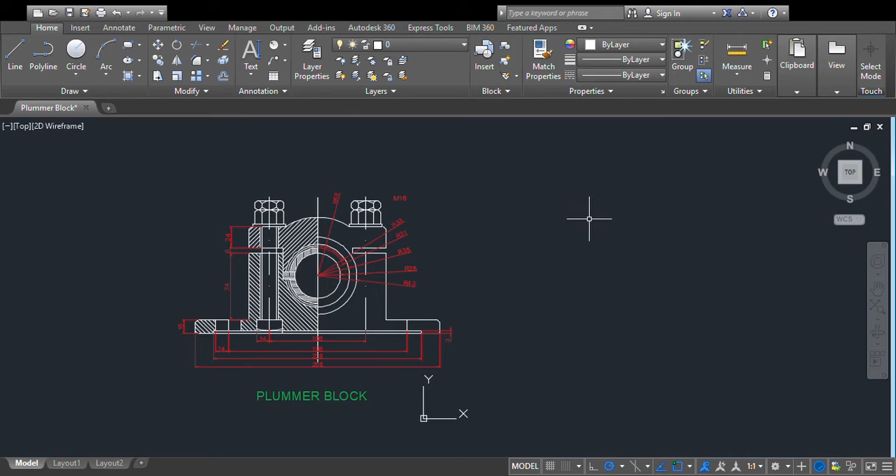First we will draw the circle of radius 25 mm. Then draw another circle of radius 35 mm. Then one more semicircle of radius 43 mm.

We have two more circles here, of radius 31 mm and 33 mm. So you got all these five circles.

Now this outermost circle is semicircle only, and the two inner circles are also semicircle. So we'll draw lines like this so that we can trim the unwanted portions.

Now select this circle, it should be half. Select this line to trim, and you don't need this portion you're trimming. Then for the second, these two circles, you don't need this much portion, so you are trimming unwanted portions of that circle.

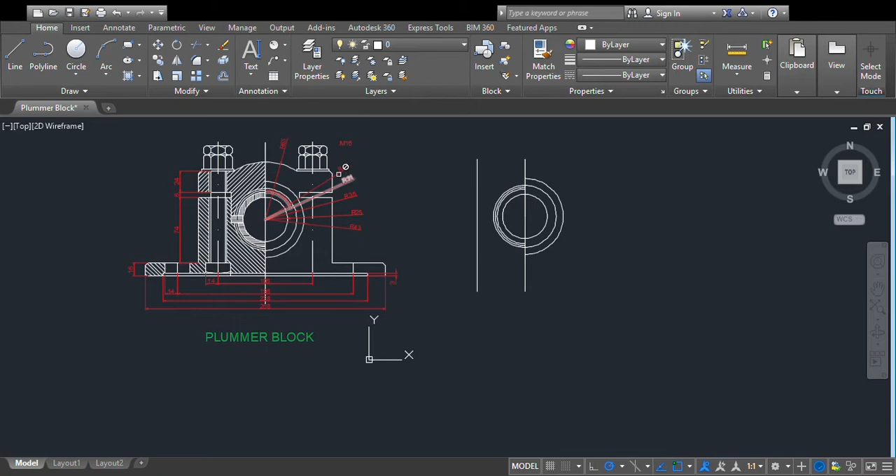Then on this side, this is an M16 bolt, which means 8 mm on either side you have to offset. So offset this one through 8 mm, on this side and this side.

Now you have to find the distance of this center from the base here. That linear distance from this center to here is given as 74 mm.

So through this center point we will draw a line like this, and then we will offset that. Now we will offset this line through 74 mm.

Now you got that point. From there this is 3 mm, so you have to offset this one through 3 mm, this line offsetting to 3 mm this side and this side. Now you got those two lines and this point also.

Now this is 14 mm away from the center point, so you have to offset this line through 7 mm on either side. Sorry, that is actually 14 mm, so this line you have to offset through 14 mm, this side and this side also 14 mm.

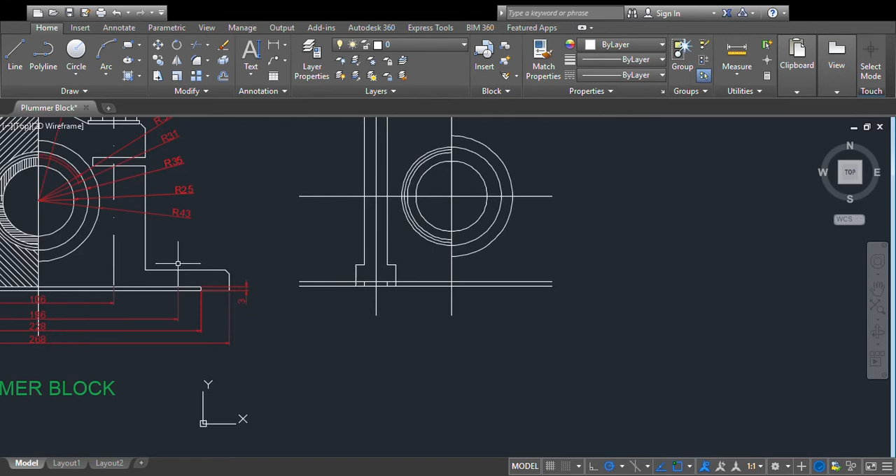Now this line you have to offset through say 2 mm on either side, to show the threads here. You have thread here, so to show that thread you have to offset this line through 1 mm or 2 mm on either side.

Before that we will measure the dimension, from here to here, that is 2 mm.

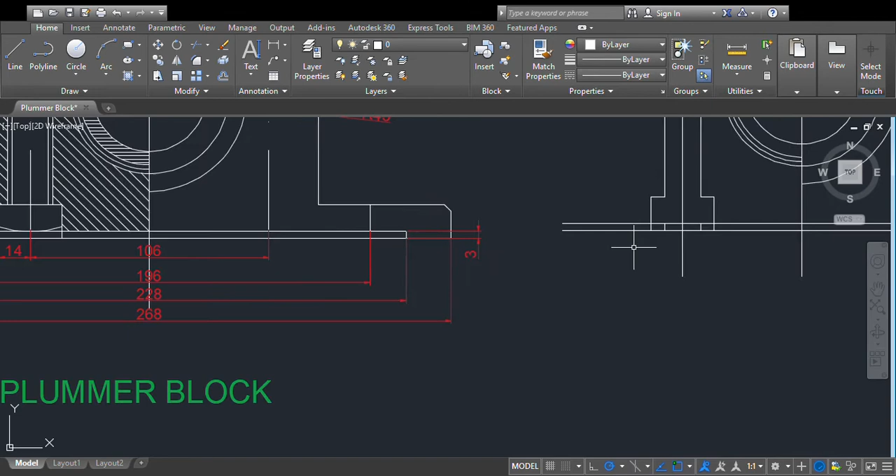So you have to offset that line, this line through 2 mm. Offset through 2 mm on either side, this line to this side and this line to this side. So you got that thread also.

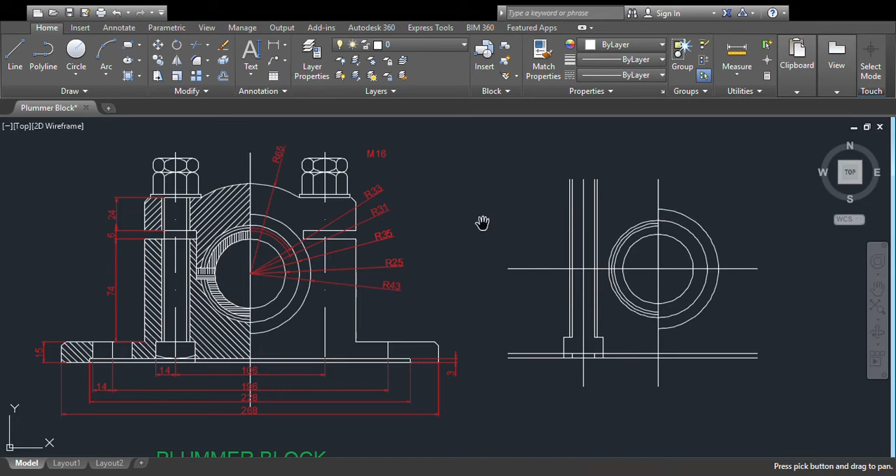Now you have a curve here, you have a curve here, you can see, you have a curve here like this. So to draw that curve, what we'll do is first we will erase this unwanted line.

Then we will offset this line through say 2 mm, this line like this. Then we will draw a curve, arc 3 point, from this point through to this point and up to that point. So you got that curve also.

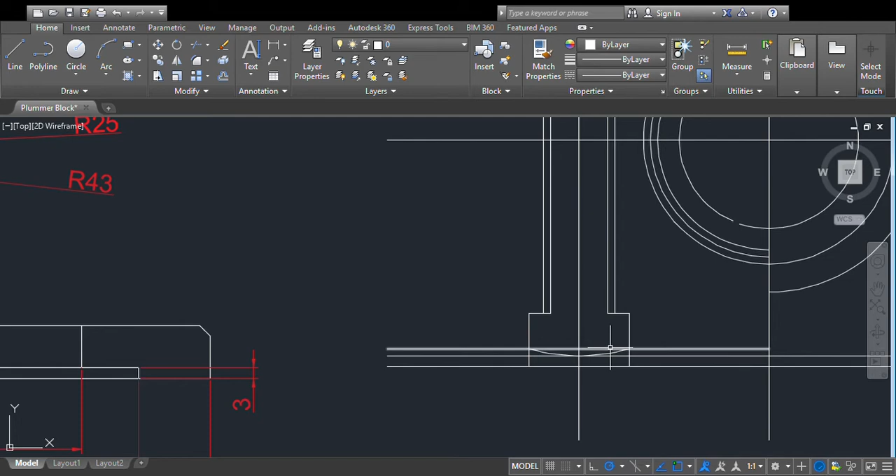Now this line is unwanted, so you will erase that, delete that. You got that curve also.

Now we have to find this distance. This is 15 mm away. So this line you have to offset by 15 mm. This line you are offsetting through 15 mm here. So you got that line.

Then you have this, this is 106, and here you have 196 as the distance from here. So 196, that means half of that is 98. So this line you have to offset through 98.

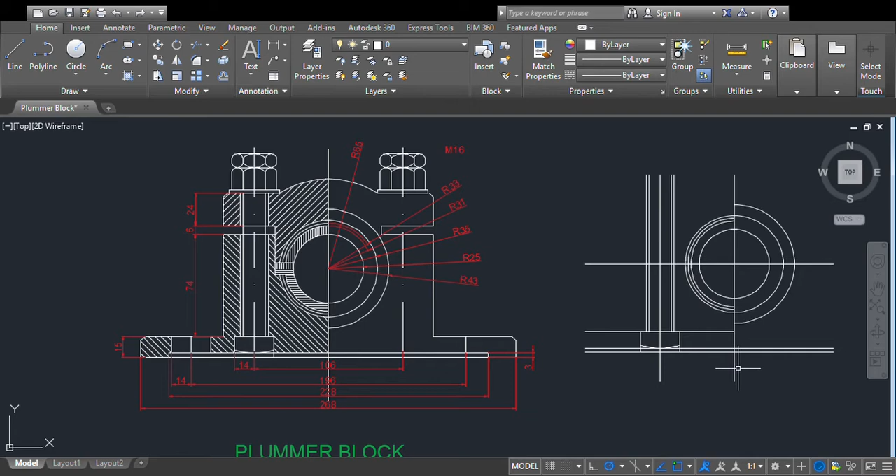First we will just move this object a little bit towards the right. Not that much, slightly only, because we need this diagram nearby, then only you can complete the diagram.

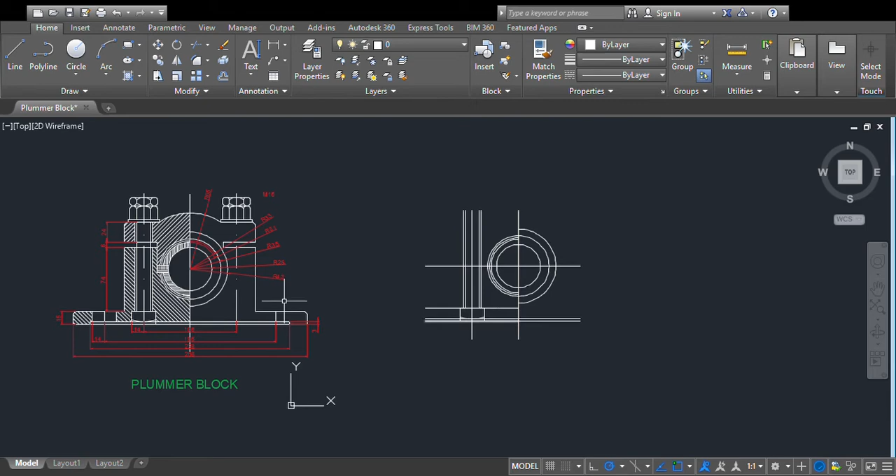So this is 196 mm from this center point to this center point. You have a hole to fix that object, this Plummer block, to the ground or something like that.

So you have a hole here, two holes. That is 196 mm, that means 98 mm, you have to offset this line, half of that. Offset through 98 this line to this side. Then you got that line.

Then you have this line you got, and this is 14 mm. Again you offset that through 14 mm on either side, this line to this side and this line to this side.

Okay, then you have this, this is 268 mm, the outermost diameter, so outermost distance. So this line again you are going to offset through 134 mm, this line you are offsetting through 134 mm like this. You got that line.

Now we'll extend this to meet there, extend this up to this line. This line you are extending to there. Then you got that point.

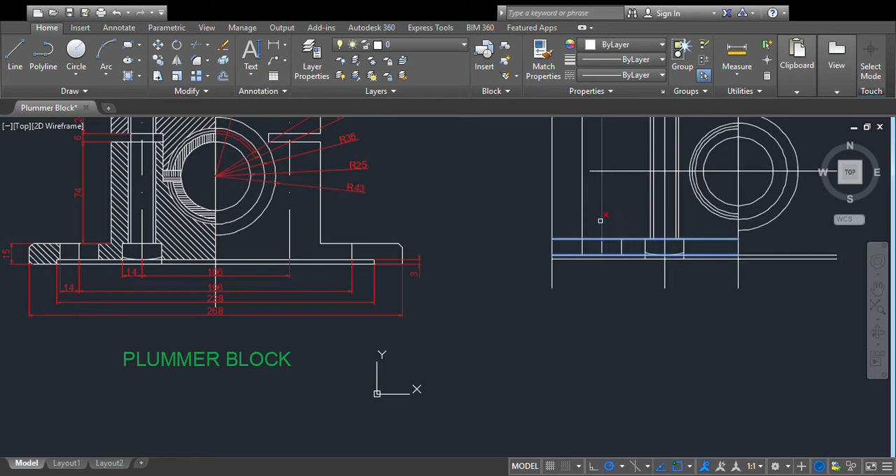Now you can erase unwanted portions. Trim this line and this line, this line and this line, you are selecting and then trimming all these unwanted portions. So you got that portion also.

Enter. Now next you have to draw this bolt. To draw that bolt, first you have to draw this line.

That distance from here is 74 mm. So offset through 74 mm, this line like this you are offsetting. You got that line, and again you have to offset that through 6 mm and 24 mm.

Again offset through 6 mm, this line through 6 mm and 24 mm, like this you can offset. So you got this line also.

Now there's a bolt there. To draw that bolt, just offset that line through 2 mm, offset through 2 mm, this line like this.

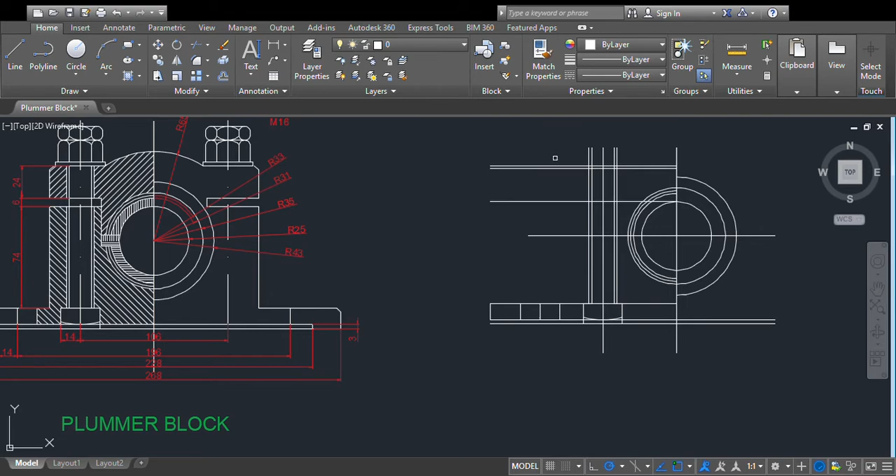Here you have a square, this is a hexagonal bolt, this is 16 mm. So again offset through 16 mm, this line through 16 mm, you got that point. Now just draw a hexagonal bolt here.

You have to trim this portion first. Trim this portion. You don't need this portion, so that is okay.

Now this is 8 mm on either side. This line you have to again offset through 8 mm, this line to this side and this line to this side. Now we'll just offset this line through 2 mm, this line like this. So you got some points here.

Now again you have to offset this line to 4 mm, offset through 4 mm, this line like this. You got the center point.

Now extend that to meet there. Extend this to here, this line you are extending, you'll get that point. Now you draw a curve through all those 3 points, like this: 1, 2 and 3.

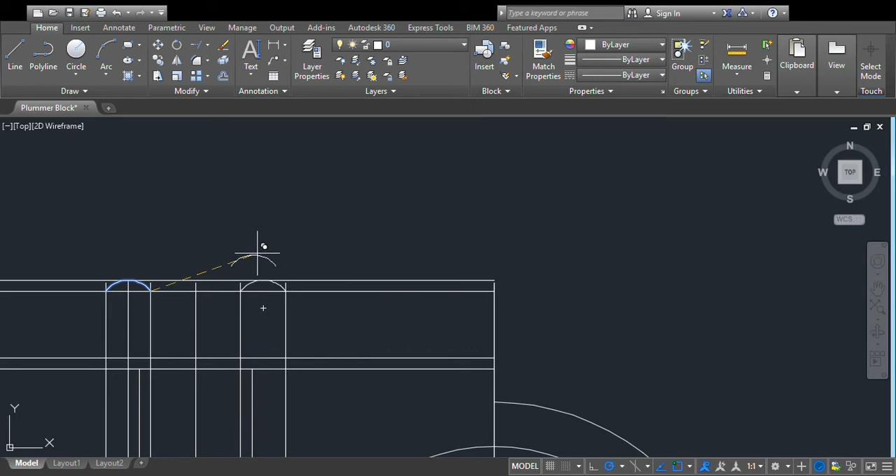Now just copy that curve, and move it like this. Then you have to draw one more curve here. So for that you have to extend that line to meet there. Extend this line to here, so you got that point also. Now another curve, arc like this, 1st point, second point and third point. Now you got that one.

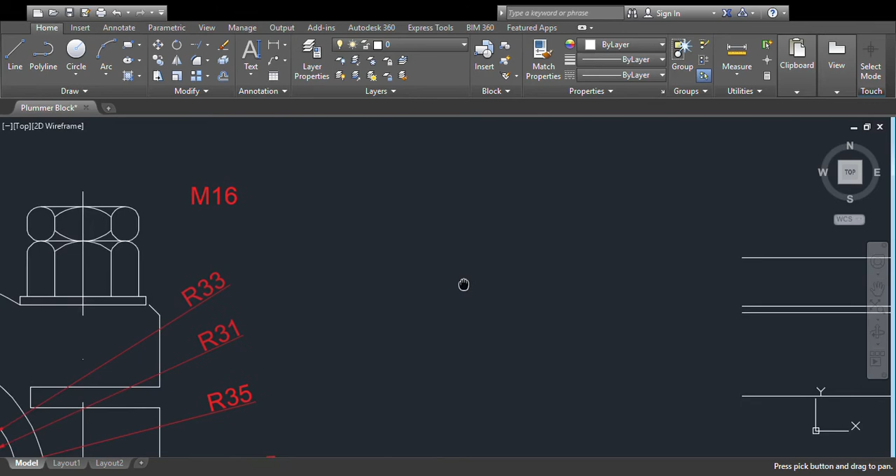Now we'll just erase this line, delete this line. Then unwanted portions you can simply erase. Now here you have, if you see this one, there is a bolt, supporting bolt, locking bolt, locking nut there. So to draw that locking nut, this line you have to offset through 8mm or 10mm, offset through 10mm, this line. Okay, so you got that line.

Then again you will offset that through 5mm, offset through 5mm, this line inwards like this, 5mm.

Now we'll take the mirror image of this one. Mirror, this 1, 2, 3 objects, and first point is this one, and second point is here, and mirror image. Mirror 1 2 3 objects. First point is this line, and the second point is this line. You got that? And there.

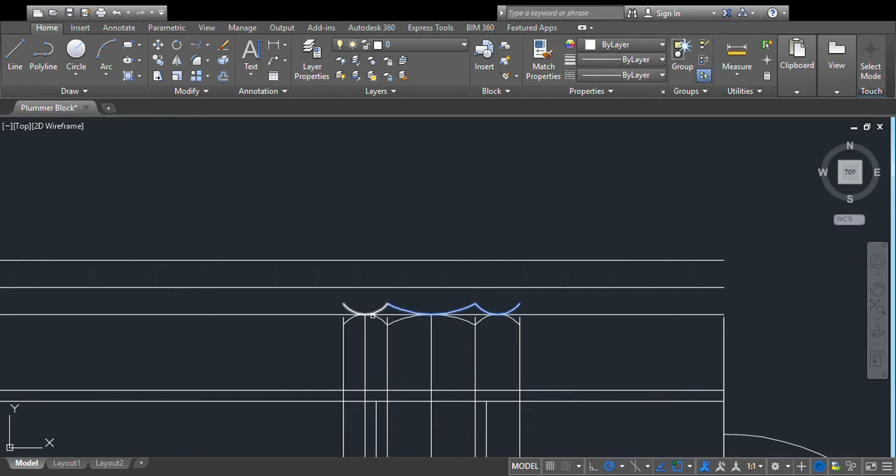Now again we'll take mirror image of this one. Mirror 1 2 3. First point is this one and second point is this one. Enter, you got that curve also. Now you can erase all these unwanted lines.

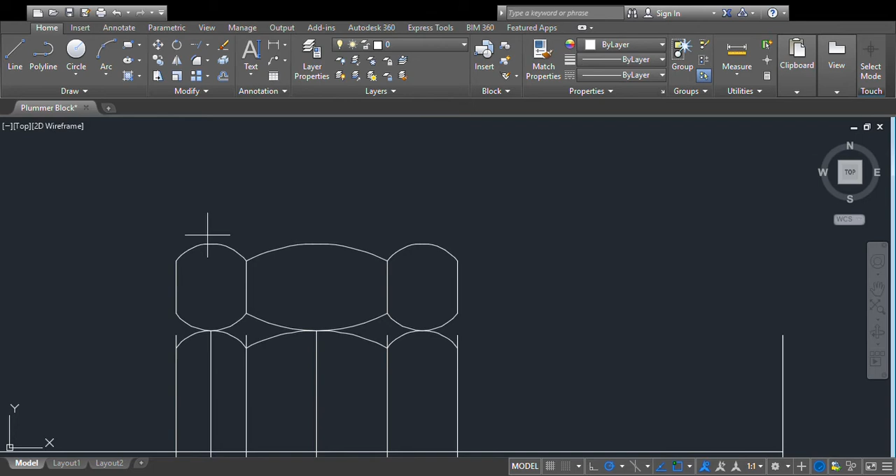Delete. Now we'll draw lines, straight lines like this. One. Enter, second line. One more line. One more line. Then one more line from here, this tangent. T-A-N, tan, okay, tan to this one. Again tan to this one. Tan to this one, so you got that line.

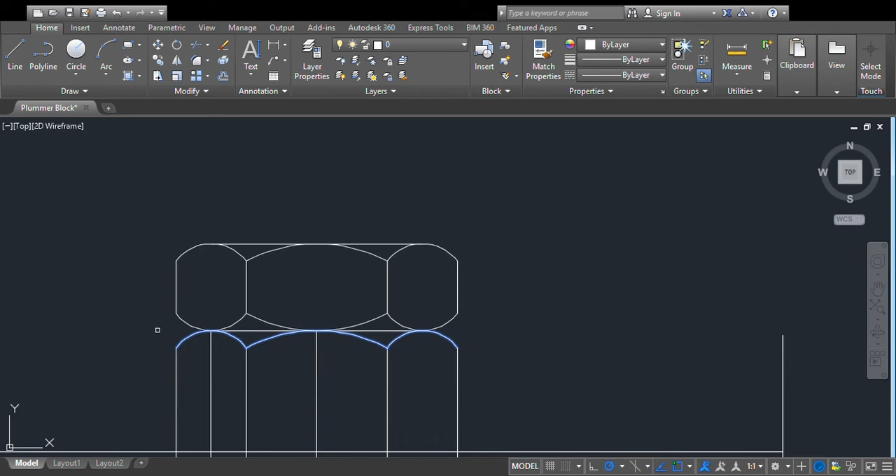Then now one more line from here to here. Then you can trim unwanted lines. Trim this one, this line, this curve by selecting. Then you can trim all these unwanted portions. Enter, this line you can erase, delete that. So you got that bolt also.

Now you have a washer here. Just draw a line like this. Then trim unwanted portions. Trim this one, and this one, and this one. You got that line. Then take mirror image of that. Mirror image of that, you got that on the other side here.

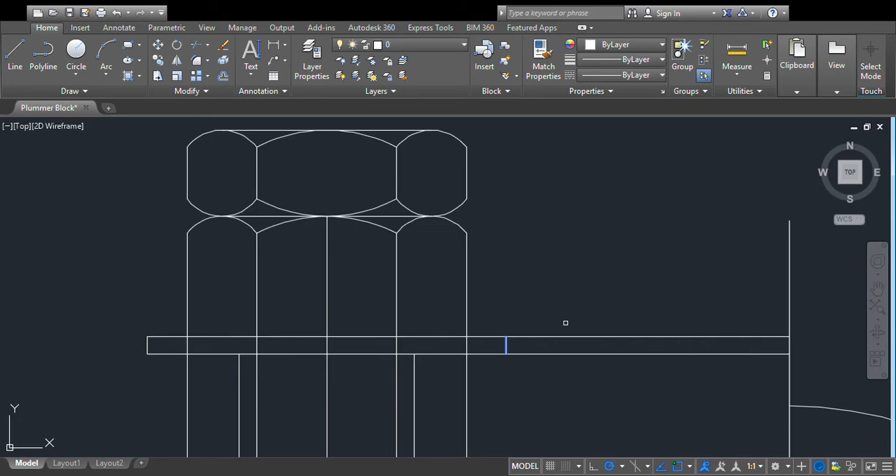Then trim that portion also. Trim, select this portion and this portion you can trim. Enter, now you got that line. Then you have this line. This is at a distance from here, distance from the center to this one is 75mm.

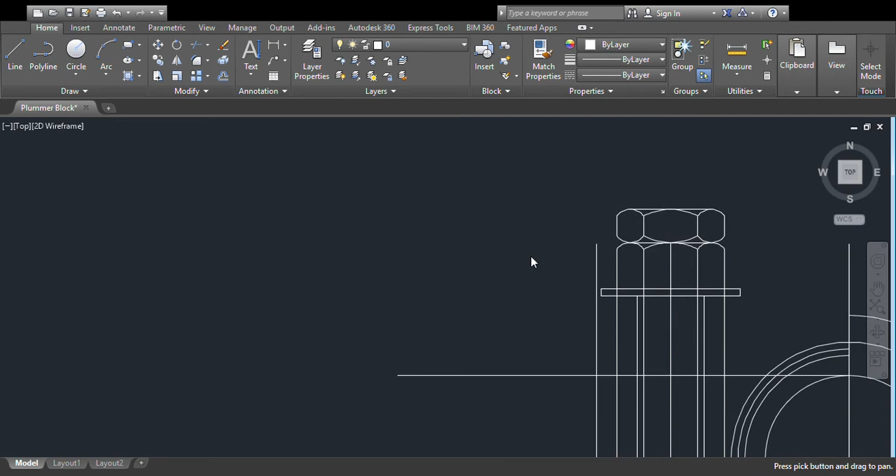So this line you have to offset to 75mm, offset to 75mm, this line. So you got that point. Now just draw a small arc from here, line from this point like this. And then you can trim that remaining portions. Trim this one and unwanted portions you're trimming. So you got that line also.

Now you have this is 7mm, okay, this is 7mm. Six mm, okay, this distance is linear distance from this one here to here is 24mm. So you have a 6mm line there. So offset through 6mm, this line through 6mm like this. Enter.

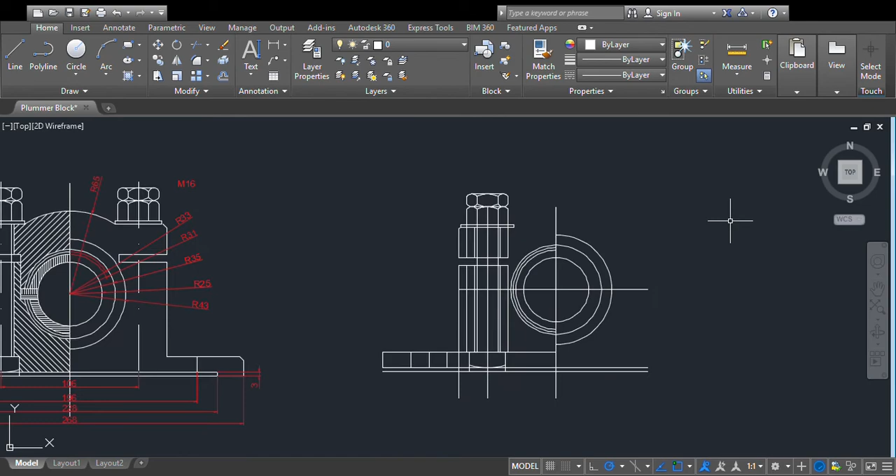Now you have to remove or trim unwanted lines. Trim. Then unwanted this inner portion also you have to trim. Trim this line and this line, and this portion also you can trim. So that's it. Now just see this is okay.

Now you have to draw that arc here, circle of radius 65mm. Okay, before that we'll take mirror image of this one, this side. So mirror image of all these portions. Base point is this one. Like this we'll take mirror image. So you got that on the other side also.

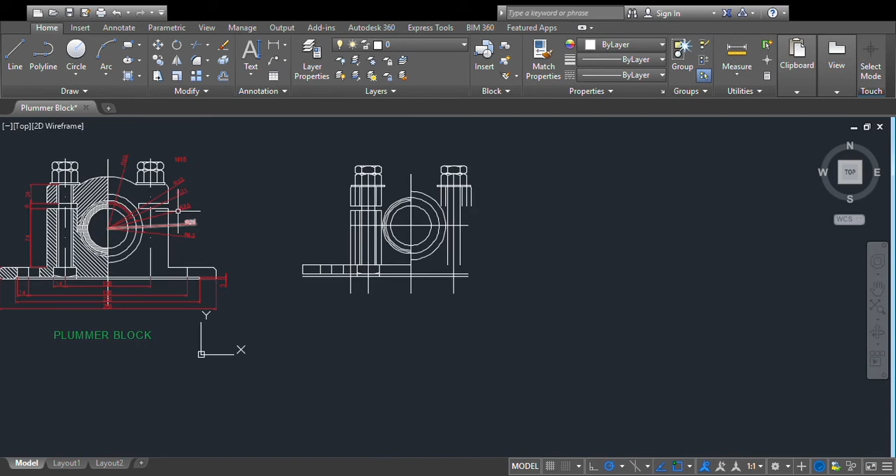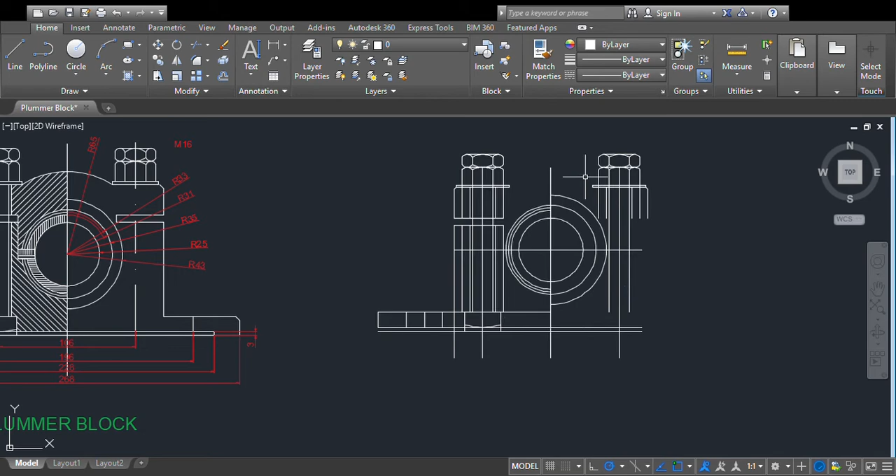Now we will draw a circle, this is radius 65mm. Circle radius 65mm, 65mm radius circle you are drawing. It's coming like this. Some problem with the distance measured. Circle of radius 65mm. This one is coming like this.

So let's do one thing. Some error in the circle. Center is this one, radius is 65mm, enter. So that is how it's coming like this. Now some error is there. Okay, so we'll do one thing, I just move this object.

Base point is this one, move it like this. Draw a line from here to here, one more line. Maybe some correction in the drawing here, some correction is there, so that's why it happened. Some dimension, some error is there. Then here maybe some correction. Okay, anyway, this one.

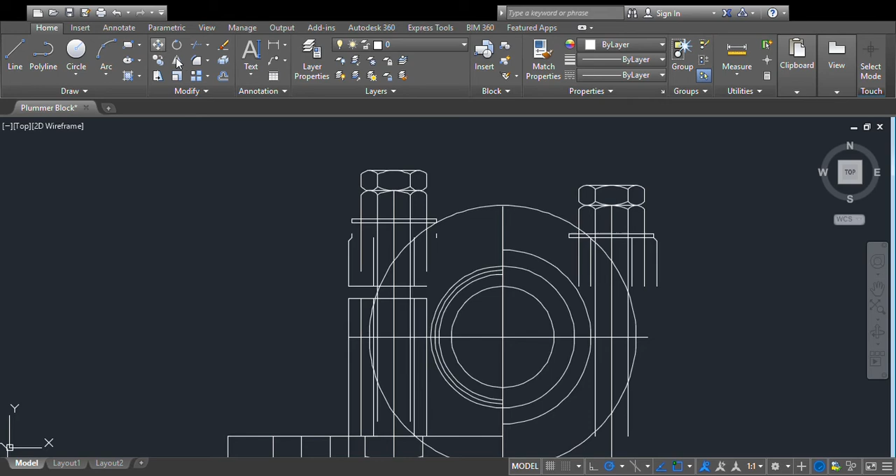Then you can just move it upwards, all these points, move this line, all these lines, base point, this, and you can just move it so that, and erase this line, this also some correction is there. We will erase all these lines, unwanted lines, and this also we will erase, delete.

Now we will take the mirror image of this one, this side. Mirror all this one, and base point is this one, and the second point is this one. Now you got that point. Enter.

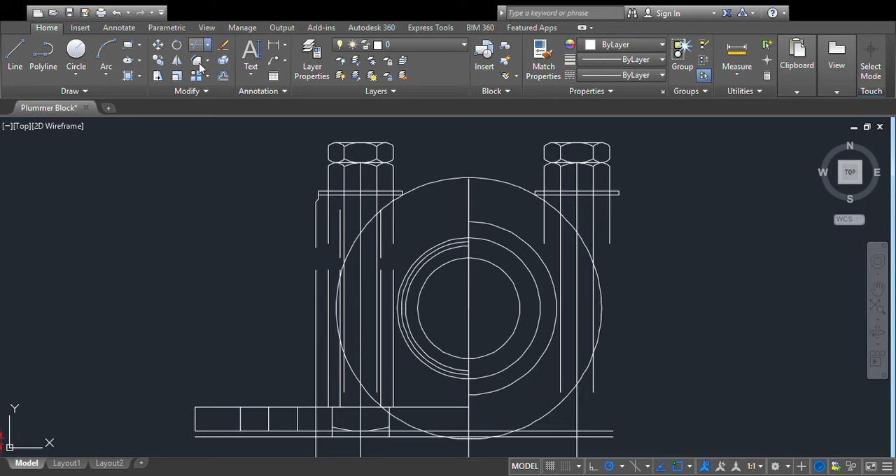You can draw a line from here to here, and one more line from here to here. Then you can trim the unwanted portion of the circle, based on this small two lines. Okay, and then you are trimming this portion, so you can get that curve. You got that curve. Now we'll just extend this one.

We'll erase all these lines, delete this line also, delete. Okay, then on this one we will extend to that line, all this line to here. Okay, this one, and that is not required. These two lines, this line, and this line.

Then you will trim this line, trim this portion, this one and this one, then you will extend that to meet there, extend to here, this one and this one.

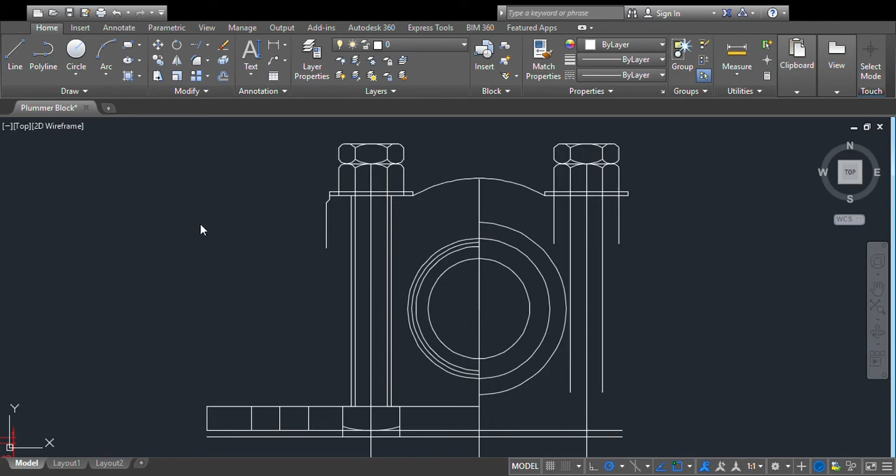Now you have to offset that. You have to offset this line by 24 mm and 6 mm. Offset through 24, this line like this, and 6 mm. Again offset through 6 mm.

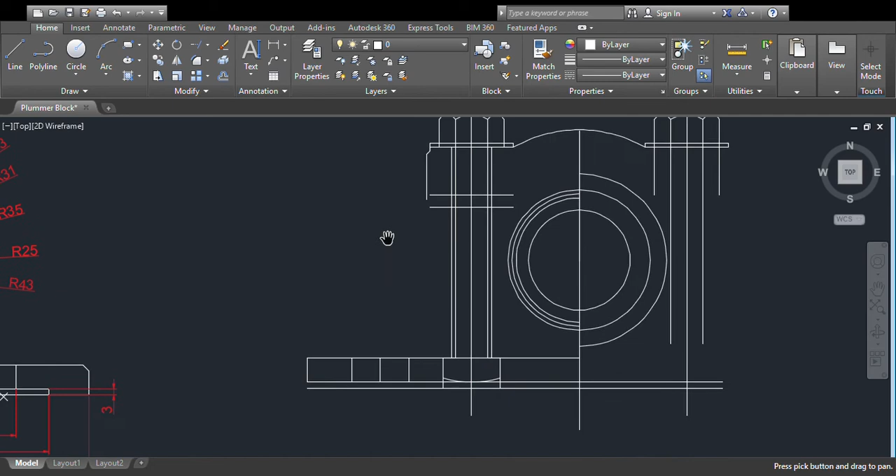Like this. Okay, now you just extend this line to meet here, extend this line to there, enter, then again extend these two lines to meet there. Okay, now you got that point.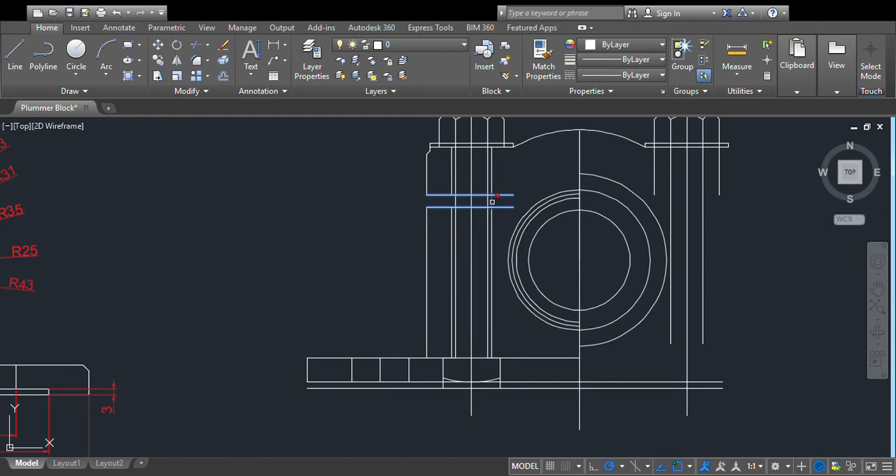Now you can erase unwanted portions here. Trim unwanted portions, trim this line, and you can trim these portions, all these inner portions. Okay, now here you have a line like this. Based on that dimension, now you can trim all these portions, trim this line, and you can trim these portions. You got that portion also.

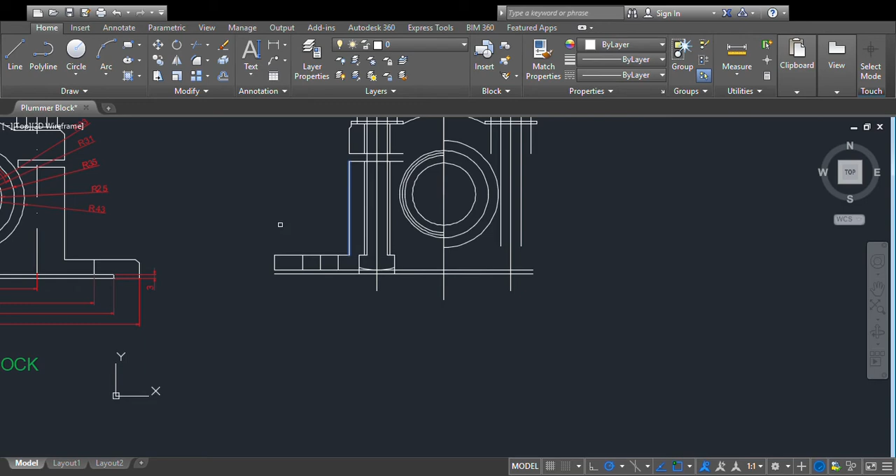Then you have a small line here. Okay, that distance is, what is the distance from, linear distance from this center, from here to here, that is given as 38 mm.

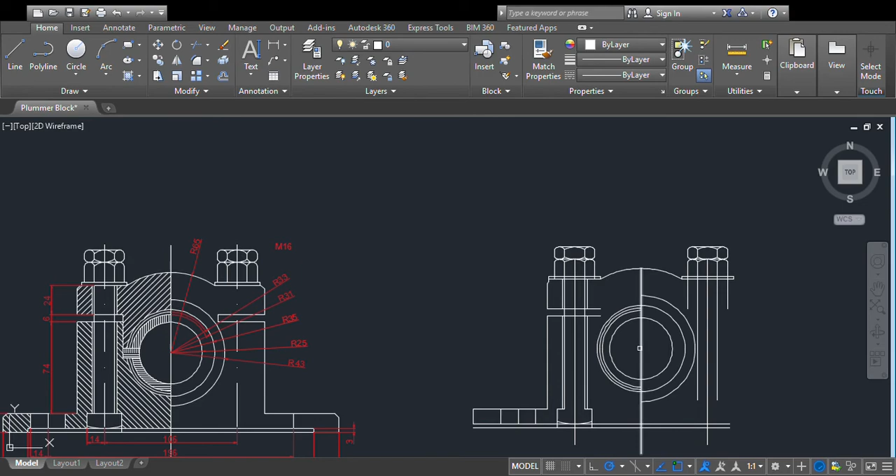So the center line you have to offset to 38 mm, offset through 38 mm, the center line, offset through 38, and this line to this side. Okay, now you got that line also.

You can trim that unwanted portion, trim this portion, all these lines you can select, and you can trim this portion, this portion, this portion, and this portion. You got that line. Okay, now what else is remaining?

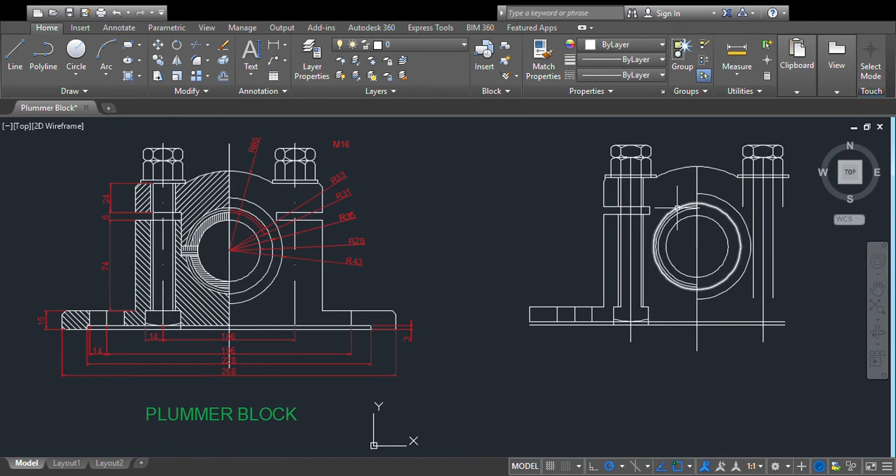So you have a small bush here, and the bush there is some extension like this. So just to draw that line, we will draw like this, center line from here, just like this. Okay, then offset that through 4 mm on either side, this line like this and like this.

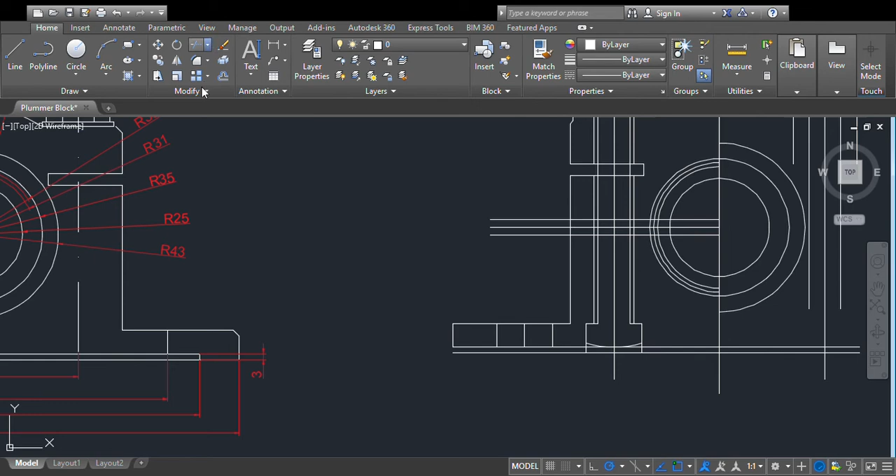Okay, then we'll extend this line to meet there, to here, this line. Okay, then you can trim unwanted portions, select this line and trim all these unwanted portions. Then you can trim all these interior portions also. Just see the diagram and cut it accordingly, so you don't need all these lines.

Trim the circle, and you have to trim all this one, and this one, and then you have some more portions here that you need. The inner portion of that circle also should be removed. So trim based on this line and this line, you are trimming the small circles, these portions. Okay, this one, this one, this one, and enter.

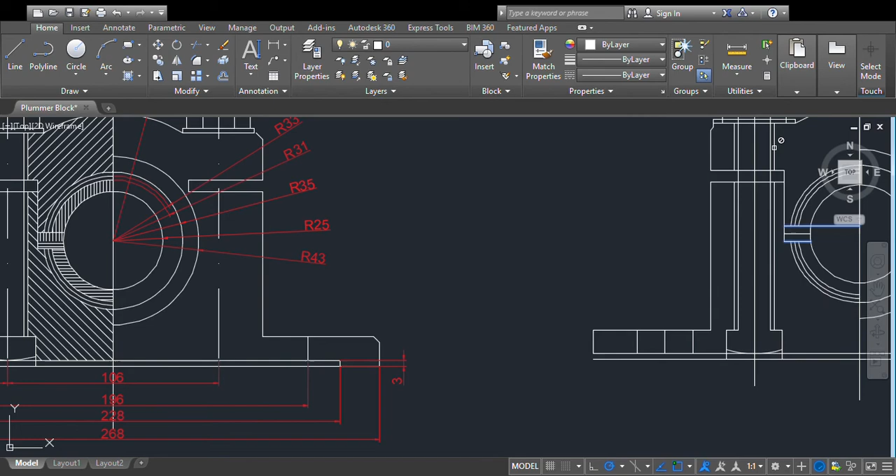So that's all. Okay, now we have to trim this portion also, trim this line, and this portion you have to trim. So that is okay. Now somewhat the diagram is completed. Now just we have to hatch it, that's all.

Take the mirror image of the side, this line. Okay, so take mirror image. So for that, mirror one, all these small portions you have to take mirror image.

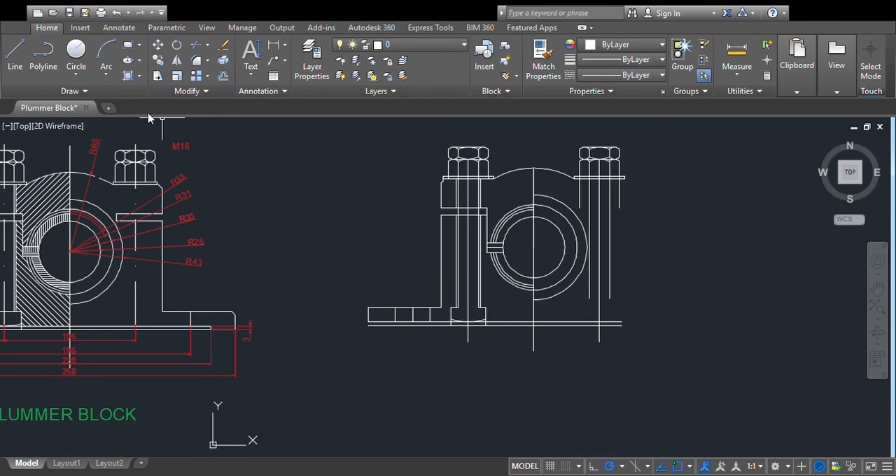Before that, we have to trim this portion also. Trim this line and this line, selecting, and then you are cutting this portion. So you got that line.

Now you will take the mirror image. Mirror all these portions, you have to take mirror image. Based on this point, you can take mirror image and you get the other side.

Okay, now you can trim these unwanted lines here. These lines and all, you can just erase, delete, just delete.

Okay, now extend that line. You take the mirror image of this one, and before that extend to this line, this one.

Okay, now take the mirror image of that extreme line, mirror image of this line based on this point, these two points. You got that point in here.

Now you'll draw a line from here to here, a line from this corner to here. Okay, and also extend these two lines there. You get that point.

Okay, now you don't need this box, I mean bolt these portions. Before that, some portions are missing here. Just take mirror image of those portions also.

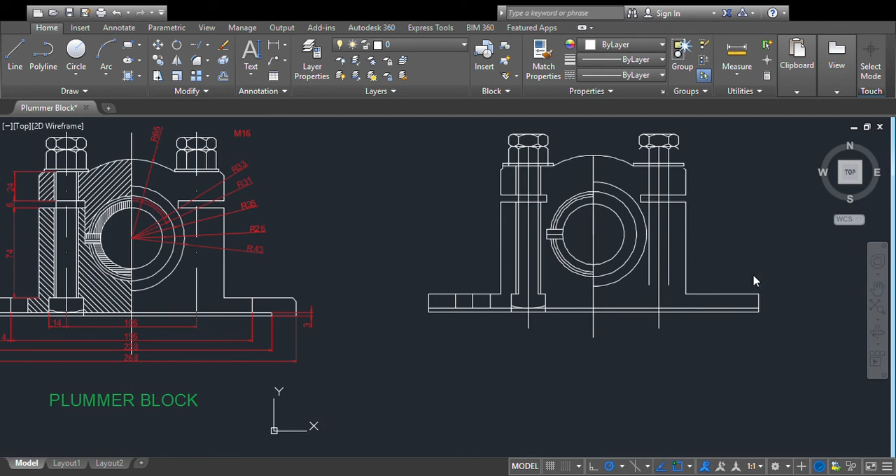These two lines also you have to take mirror image, this line and this line, based on this point and this point. You get the mirror image.

Okay, now this you have to trim. Before that, here this one you have to keep, remaining portion you have to trim. Okay, so trim.

Trim this line and this line. You have to trim this portion, this portion, sorry, and this portion here to trim.

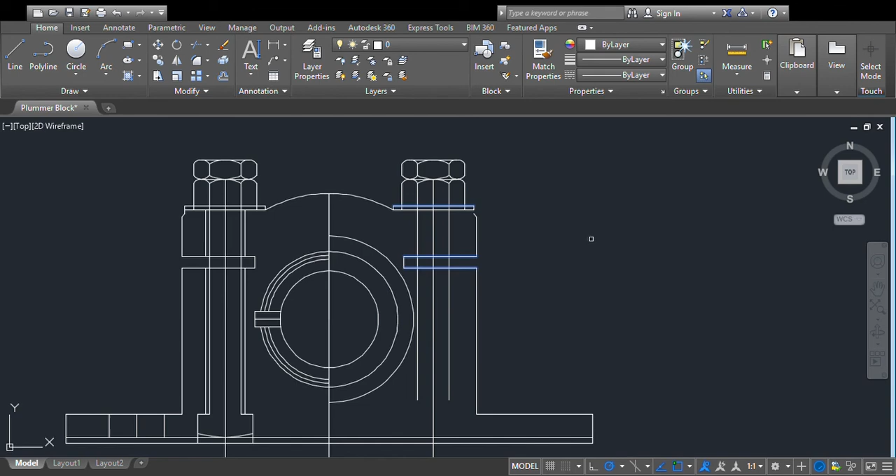Trim, select this line and this line. You have to trim this portion, this portion, this portion, and this portion. So that's it.

Now here you have a small fillet, so fillet, there is fillet, chamfer. Okay, chamfer distance, you select 5 mm, 5 mm or 3 mm on either sides, 3 mm on this side and this side. You can chamfer it there like this. Enter.

Then here this side also you can chamfer. Chamfer distance 3 mm on either sides. Give enter and you can just chamfer that. Enter.

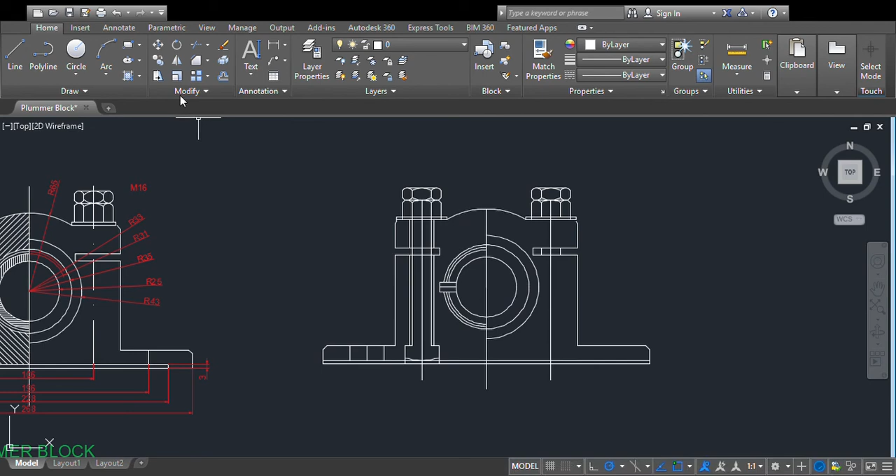Now this is it. Now you can just hatch it. Hatch it accordingly, this one hatch, this one here and here, you can hatch this portion.

Hatch this portion, hatch this line, this one.

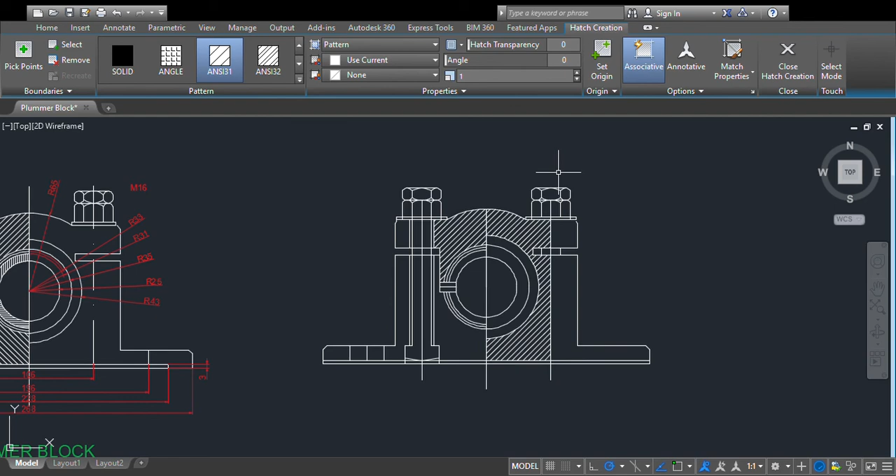This line you have to extend, otherwise this hatch will come to this side also. Okay, extend to this curve, this line. Okay, extend to this curve, this line.

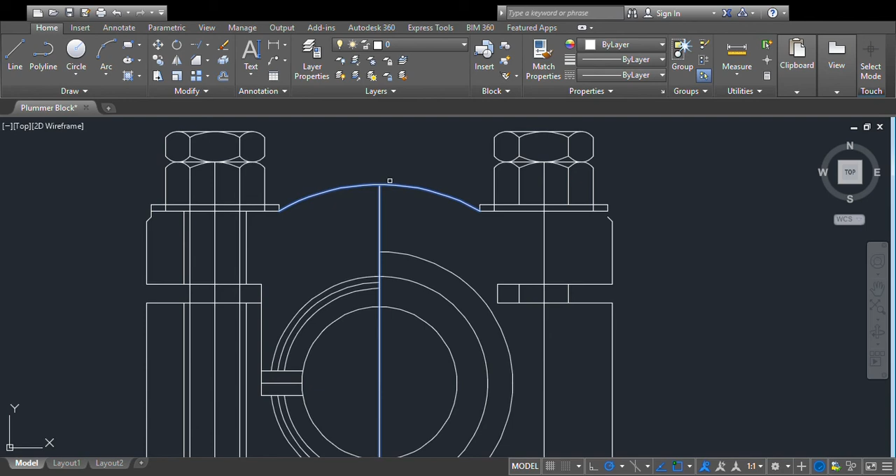Here you can see a small gap, so extend to this line, right click this line. Okay, now if you hatch it, it will not close that side. Hatch this pattern here,

and here, no, that is another type. Only here. Okay, now you have to hatch it, but in the opposite angle. Take 90 degrees, but in the opposite angle. Okay, 90 degrees, this side, here and here. You can hatch.

Then you have bush there, so to show the bush, you can hatch it, but distance also you have to change. Distance is this one. You just take some other angle, 135 degrees, and scale also you have to reduce, some 0.5.

This one here and here. Okay, then escape, then you select a hatch, angle to take 90 degrees, this portion and this portion, enter. Okay, and escape. Then again you have to select hatch, otherwise everything will be changed.

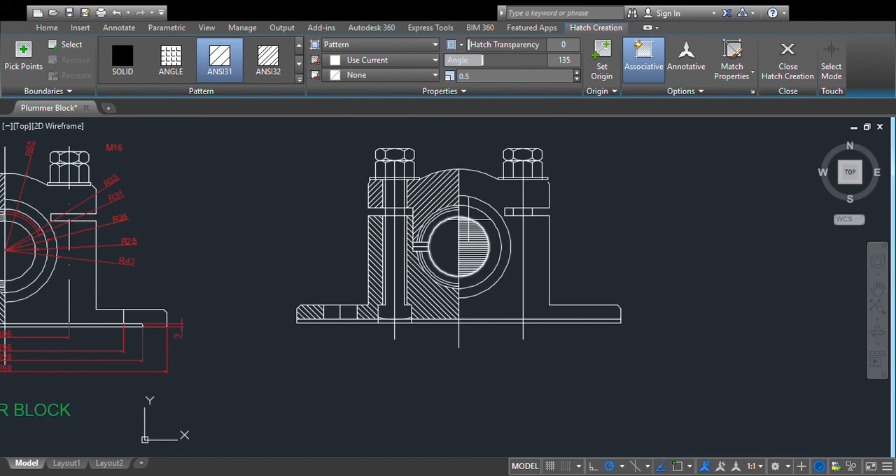Hatch, select this one. Now we select the angle 135, distance, scale some 0.5. Okay, then where you have to hatch, bush is there, so that is the bush, so you have to hatch that and this portion, that and this portion, small portion you're hatching.

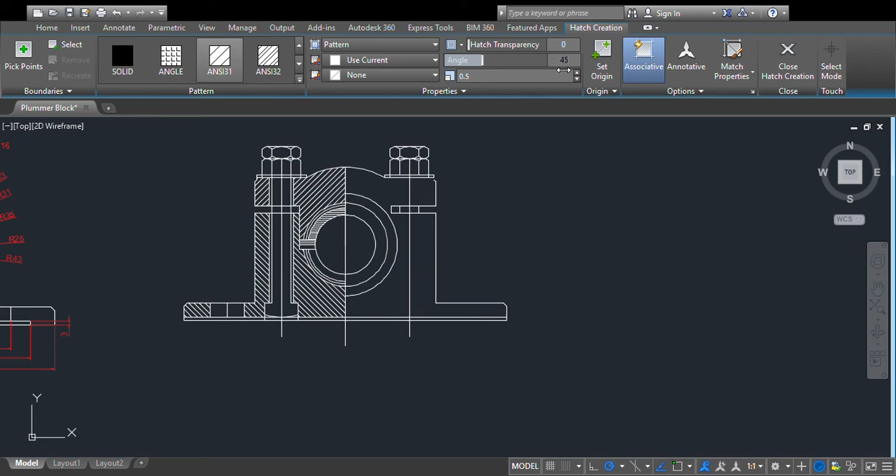And again escape. Then again you have to hatch, angle you take some 45 degrees. Okay, same dimension, same design. Here you are hatching. So that's it.

Now you can just dimension that like this, and you can type the Plummer block. So that's how you draw a Plummer block.